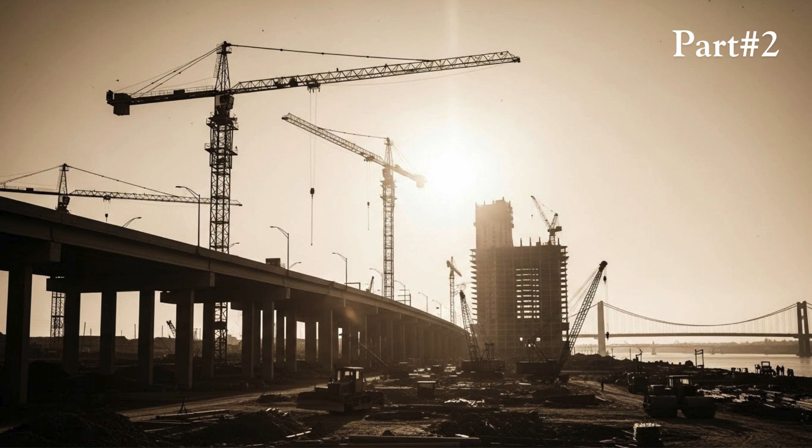To understand why this bridge failed, we have to go back, long before the day it collapsed. Back to a time when America was building at an extraordinary pace. When this bridge was first designed, the country was in the middle of an infrastructure boom. Cities were expanding. Traffic was increasing. Engineers were being asked to solve problems quickly and efficiently.

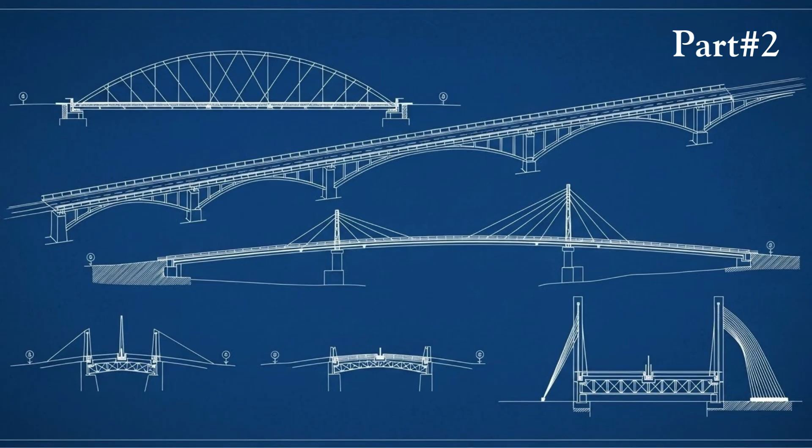Bridges were not just transportation tools. They were symbols of progress. This bridge was designed to meet the standards of its time. It followed accepted engineering practices. It was reviewed, approved, and constructed with confidence. And at the time, there was no reason to doubt those decisions. Because engineering, like all human systems, is shaped by the knowledge and assumptions available in that moment.

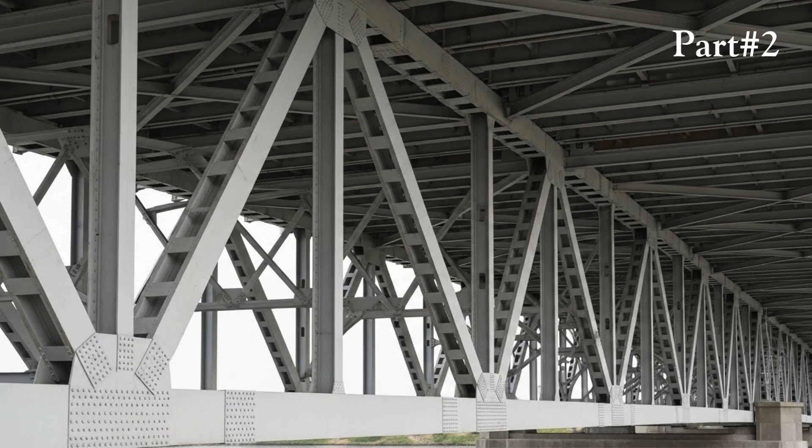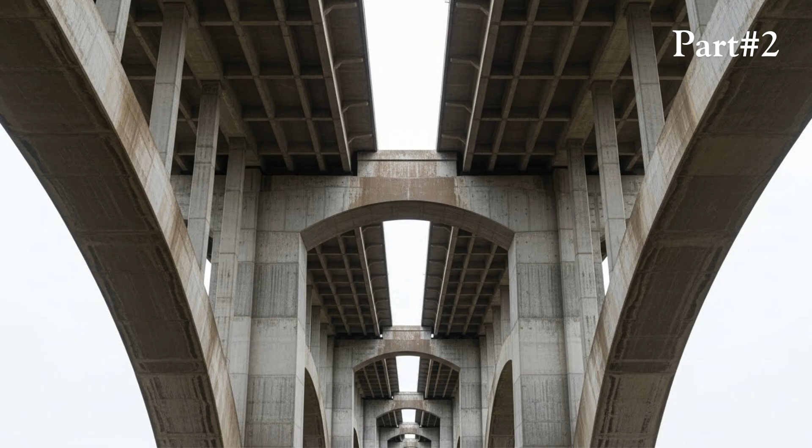The bridge used a structural system that was widely trusted. Steel components carried loads through interconnected elements. Forces were distributed across beams, joints, and plates. Nothing about the design appeared experimental or risky. In fact, it was considered efficient. Efficient designs use less material. They reduce costs. They meet performance requirements without excess. And for decades, this approach worked. But efficiency has a hidden weakness. It leaves less room for error.

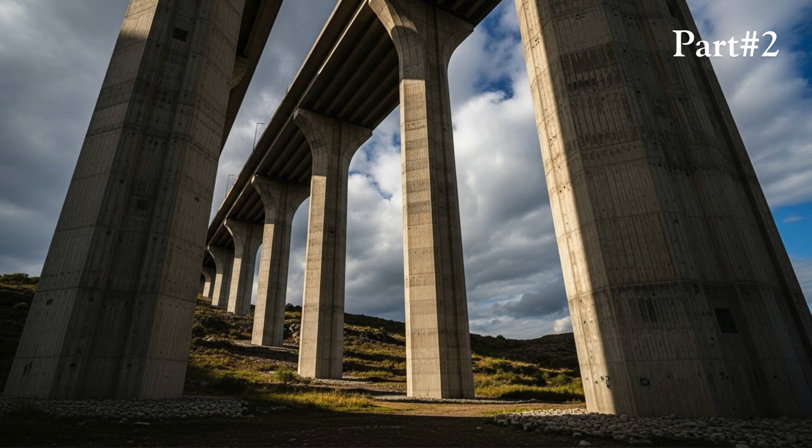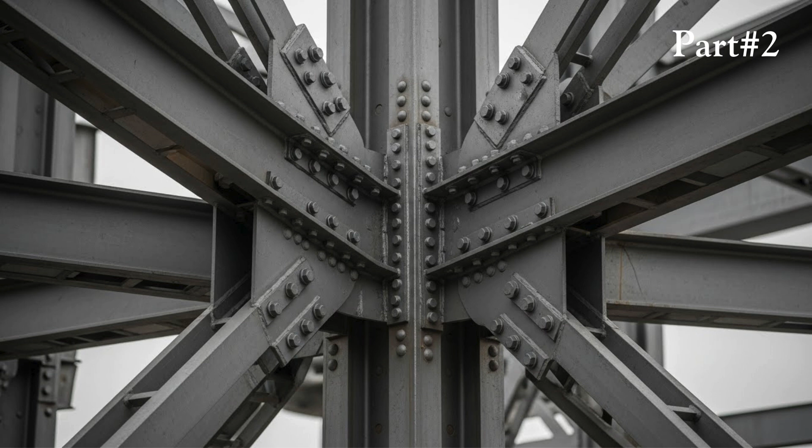When people imagine bridges, they think of massive beams and towering supports. But bridges don't fail because of the biggest pieces. They fail because of the smallest ones. In this bridge, certain critical components were responsible for holding multiple structural elements together. They were not designed to bend. They were not designed to stretch. They were designed to hold. As long as those components performed their job, the entire system remained stable. But if even one of them became overloaded, the consequences would ripple outward.

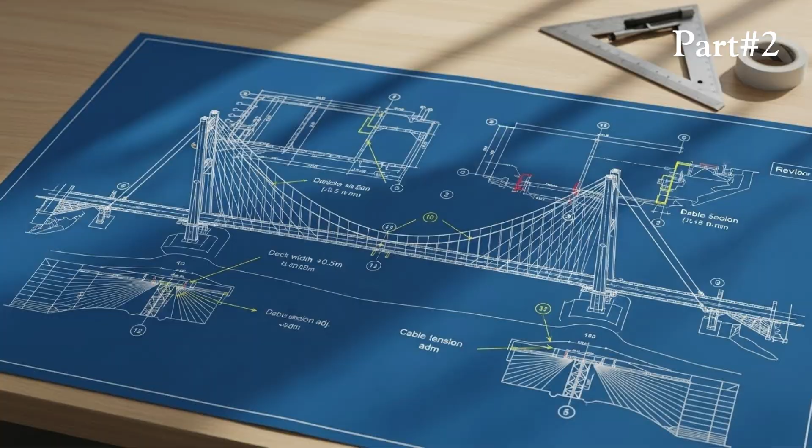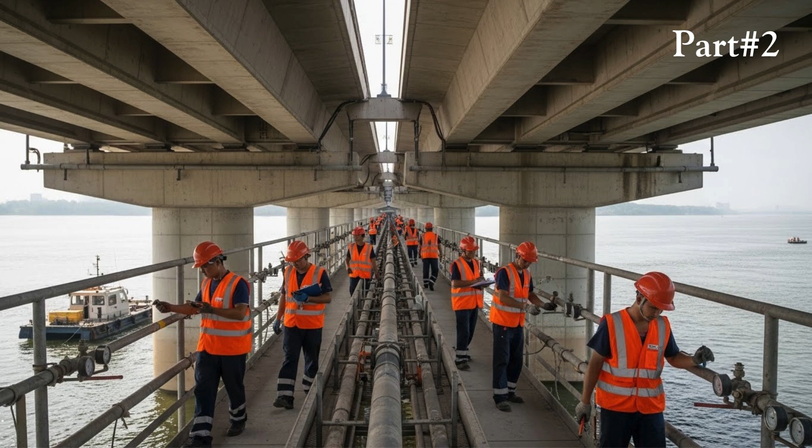At the time of construction, engineers made assumptions that seemed reasonable. Traffic volumes would grow gradually. Vehicle weights would remain within expected limits. Future modifications would be modest. Those assumptions were documented, reviewed, and approved. And for many years, they appeared correct. Traffic increased, but not suddenly. Repairs were made, but within expected ranges. Nothing dramatic happened, and that lack of drama reinforced confidence.

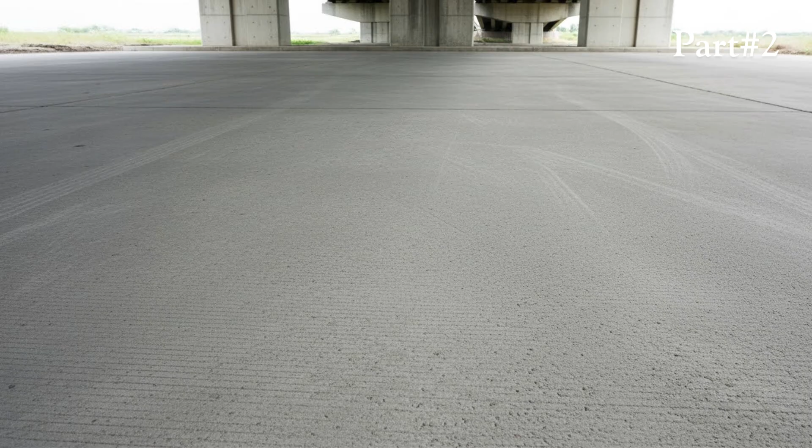As the years passed, the bridge aged like all structures do. Steel expanded and contracted with temperature changes. Concrete experienced stress from repeated loads. Connections endured millions of cycles of use. None of this is unusual. Bridges are designed to age. What matters is how that aging is managed.

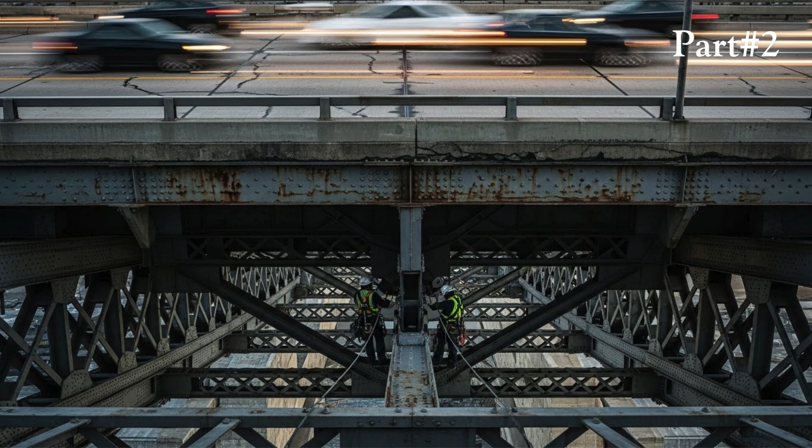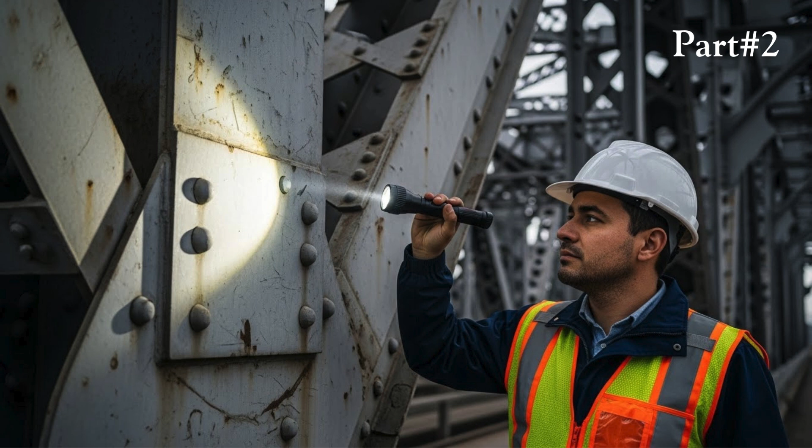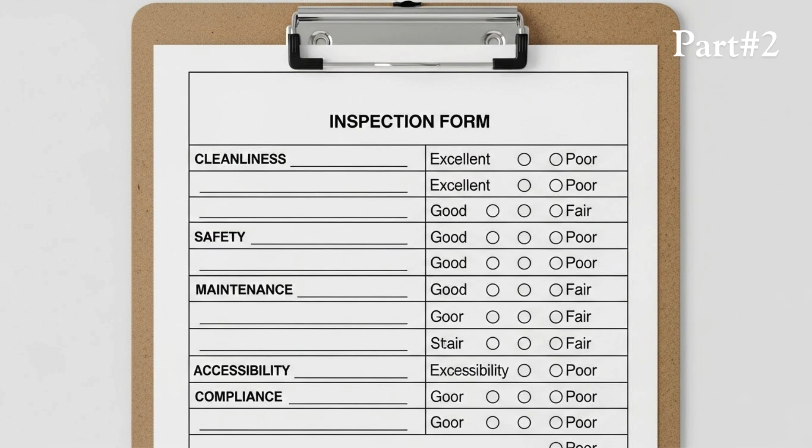Most Americans never see a bridge inspection. They don't know how often inspections occur. They don't read engineering reports. They don't study load ratings. And they don't need to, because inspections exist to remove that burden from the public. Inspectors examine visible components. They document wear, corrosion, and cracking. They rate structures using standardized systems. These ratings determine whether a bridge stays open, receives repairs, or is scheduled for replacement. In theory, this system works. In practice, it depends on interpretation.

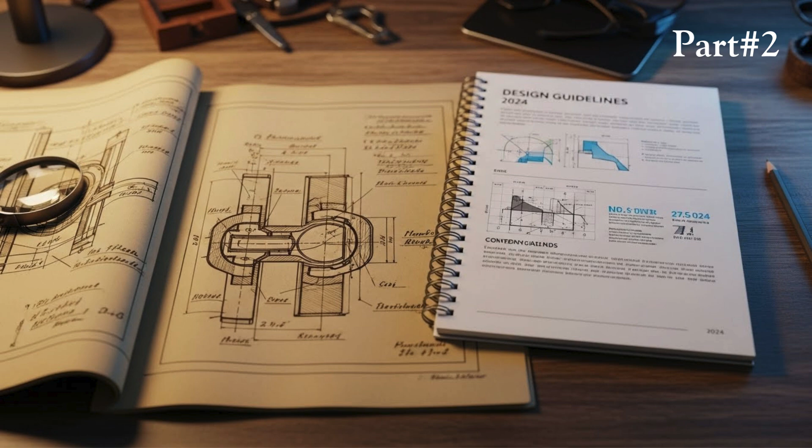This is one of the most misunderstood terms in American infrastructure. A bridge labeled structurally deficient is not automatically unsafe. It means that certain components do not meet modern standards. Many bridges across the United States carry this label and remain open for years. This classification can create a dangerous illusion. The public hears deficient and assumes urgency. Officials hear deficient and see a familiar category. And when a condition becomes familiar, it becomes normalized.

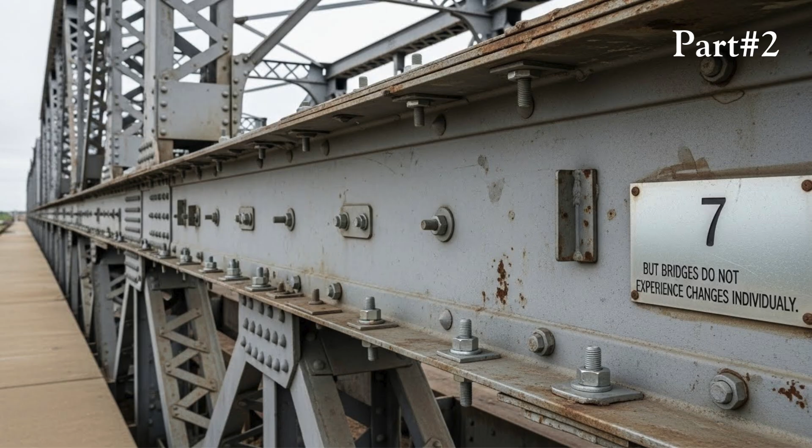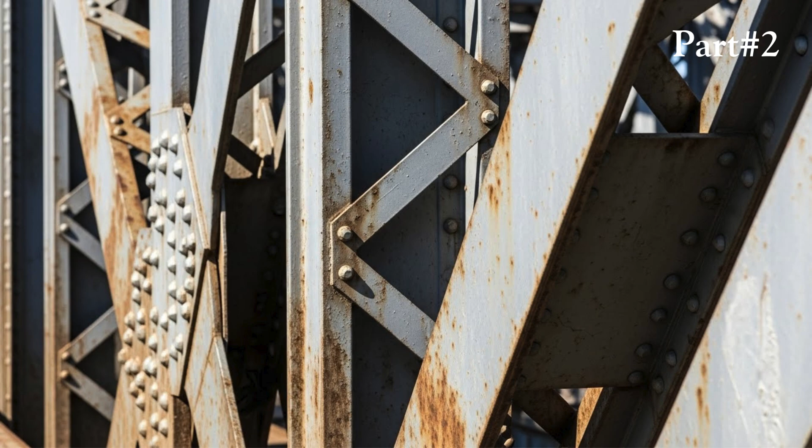Over time, the bridge underwent modifications. New equipment was added. Safety features were updated. Traffic patterns changed. Each change seemed small. Each addition was approved individually. But bridges do not experience changes individually. They experience them collectively. Weight added in one decade remains there in the next. Stress accumulates. Margins shrink. And those margins are rarely visible from the surface.

This bridge was designed under standards that no longer exist. Modern engineering places greater emphasis on redundancy. The idea that if one component fails, others can compensate. But this bridge did not have that luxury. Certain components carried more responsibility than engineers at the time fully understood. If those components failed, there was no backup. That is now a flaw by modern standards. It was simply how bridges were built then.

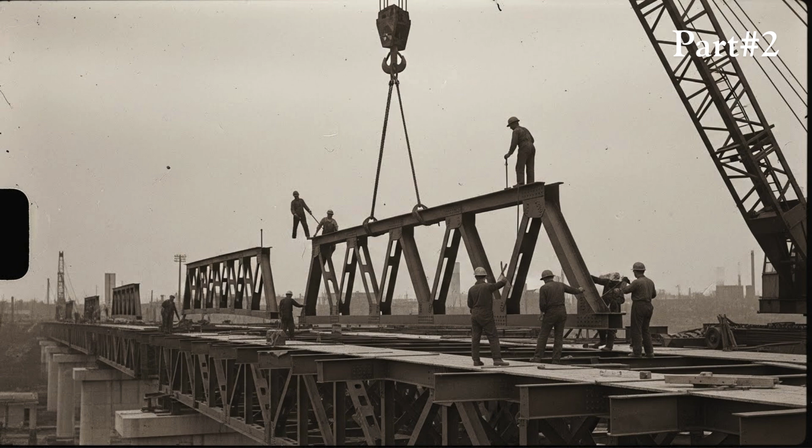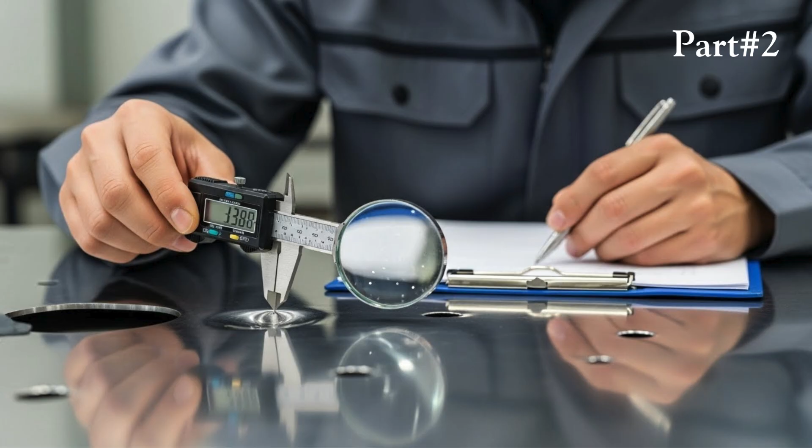Inspection reports noted issues: fatigue, stress, wear. But none of these findings triggered immediate closure. Why? Because they were not interpreted as imminent threats. Engineers often think in probabilities. A component may be overstressed, but not beyond failure. A crack may exist, but not yet critical.

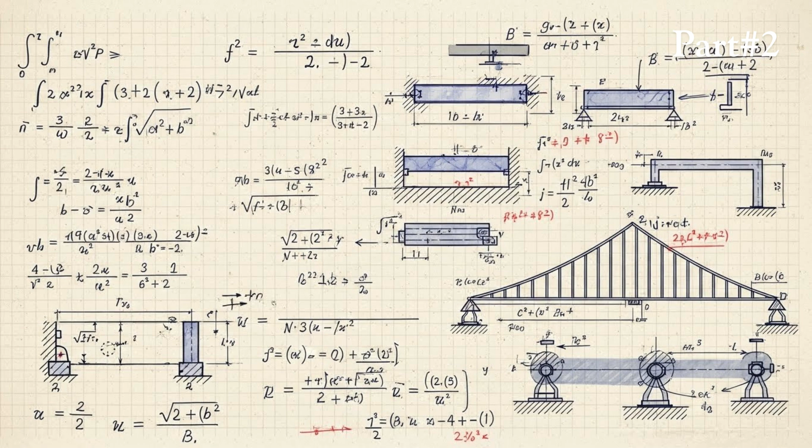And when infrastructure budgets are limited, decisions become comparisons. Which bridge needs attention first? Which repair can wait another year? These are not careless decisions. They're constrained ones. To engineers, the bridge represented a set of calculations. To the public, it represented a promise.

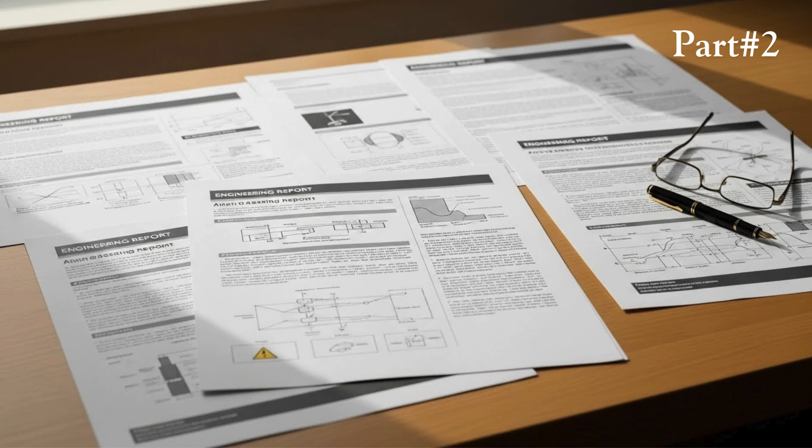That gap matters, because when engineers see gradual deterioration, they see time. When the public sees an open bridge, they see safety. And as long as the bridge remains open, trust remains intact. One of the most important things to understand about this bridge is that there was no dramatic turning point. No report screamed danger. No inspection demanded immediate closure.

Instead, there was a pattern: small concerns, manageable risks, deferred decisions. This pattern is common, and it is why infrastructure failures are so difficult to predict and so devastating when they occur. Engineering relies on models. Models rely on assumptions. Assumptions rely on data available at the time.

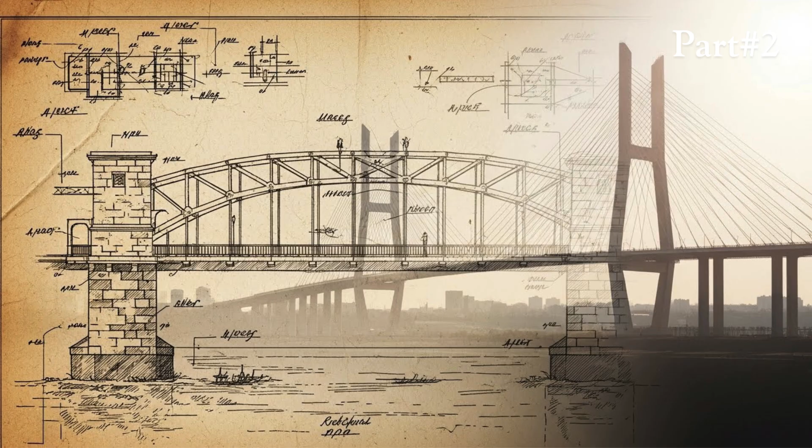What engineers did not know then is just as important as what they did know. Material behavior under long-term stress. The cumulative impact of repeated modifications. The interaction between multiple small changes. None of these were fully understood when the bridge was designed.

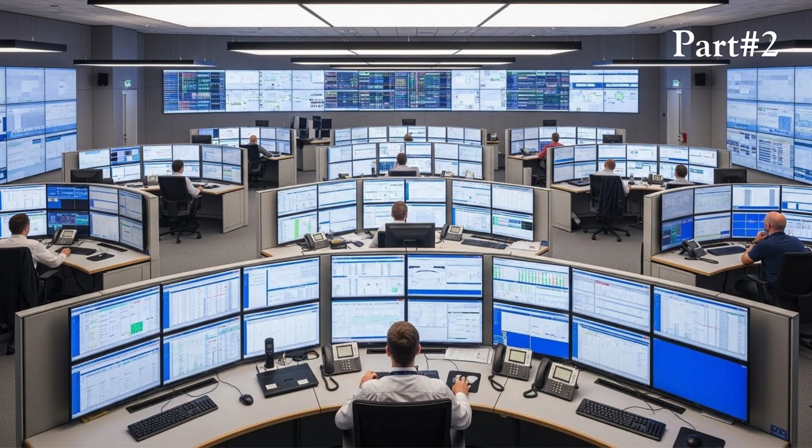From the outside, the bridge looked unchanged. From the inside, its stress profile was evolving. That difference is critical, because systems rarely announce when they are approaching their limits. They continue to function until they don't. This is the question Americans always ask. Why didn't someone stop it?

The answer is uncomfortable. Because nothing appeared broken. There was no clear threshold crossed. No rule violated strongly enough to force action. And when responsibility is distributed across systems, agencies, and timelines, urgency becomes diluted.

For decades, this bridge performed its function. It carried traffic. It supported commerce. It connected communities. It did not fail early. It failed late, after years of service, after countless successful crossings. And that success masked its vulnerability. The more familiar a system becomes, the less likely people are to question it.

Inspectors see the same structure year after year. Officials review similar reports repeatedly. Commuters cross without a second thought. Familiarity creates comfort. Comfort reduces urgency. At no point were commuters told, "This bridge is aging. This design has limited redundancy. This structure carries less margin than modern bridges."

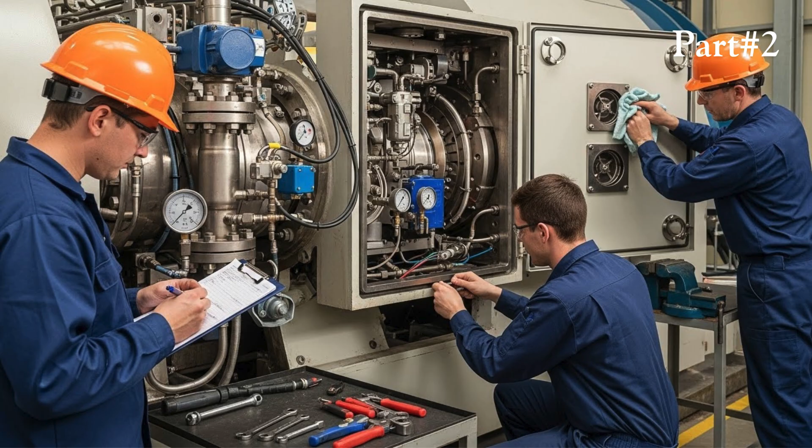They were never meant to be told, because the system was designed to manage risk quietly. And quiet systems fail quietly until they don't. By the time the public became aware of the bridge's vulnerabilities, it was already too late. The engineering story had been unfolding for years. Not dramatically, not urgently, but steadily. And that is what makes this failure so instructive.

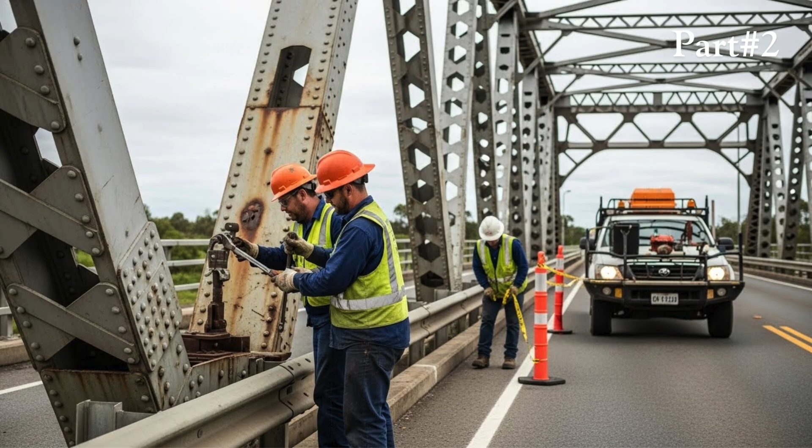This bridge was not unique. It was representative, built during a period of rapid expansion, maintained under constrained budgets, modified incrementally. Thousands of bridges across the United States share similar histories. And that reality raises a question that engineers and policymakers still struggle with. How do you prioritize risk when failure is rare, but catastrophic?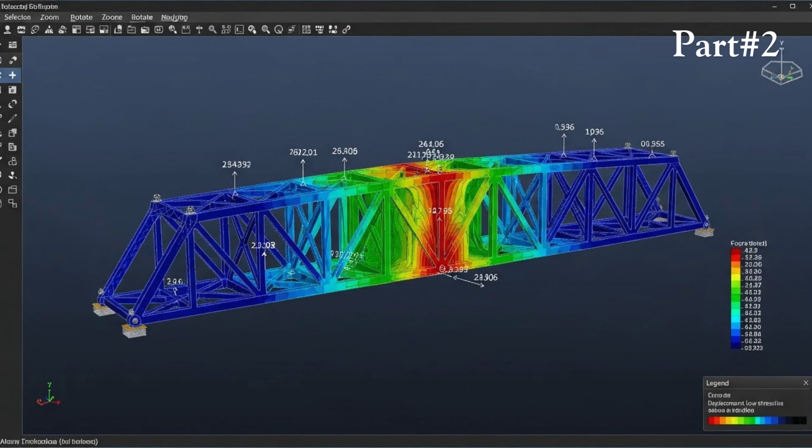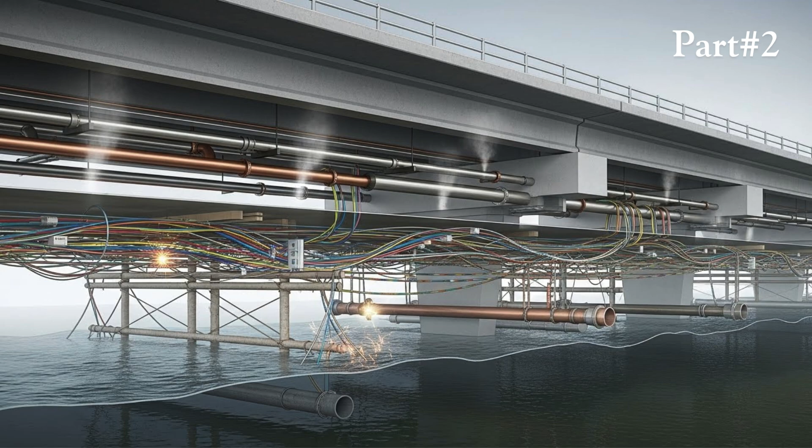Engineering can predict stress. It can estimate fatigue, but it cannot always predict timing. Systems often fail not at the moment of highest risk, but at the moment of coincidence. A combination of factors, a convergence of conditions. That unpredictability is what makes infrastructure both resilient and fragile.

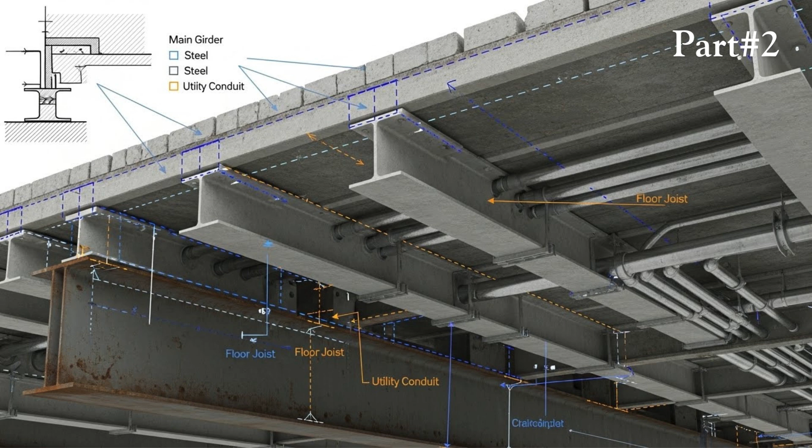The public saw a bridge. Engineers saw a system under evolving stress. Administrators saw budget constraints and timelines. Each perspective was incomplete, and none of them alone were enough to prevent what came next.

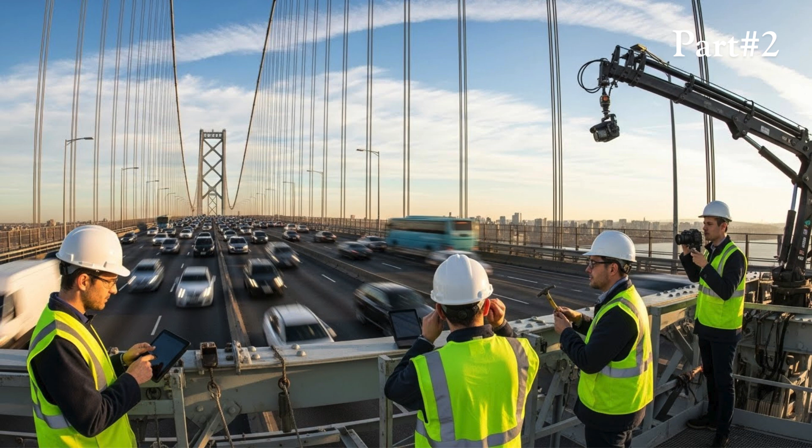This bridge did not collapse because it was ignored. It collapsed because it was understood, but not urgently enough. Because risk was acknowledged, but managed gradually. Because no single warning outweighed the comfort of continued operation.

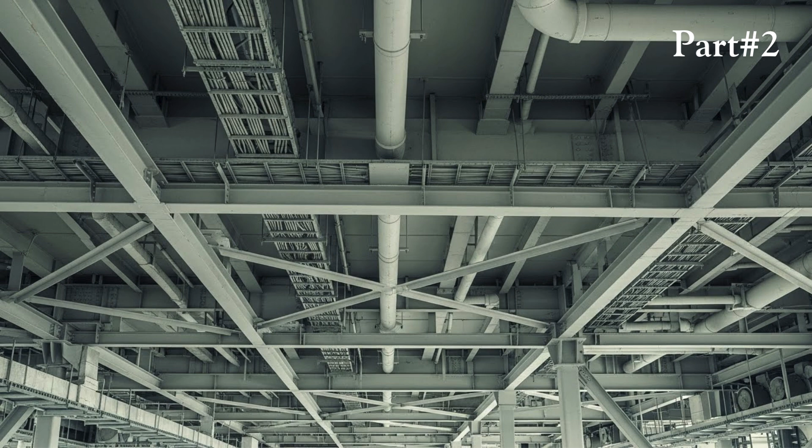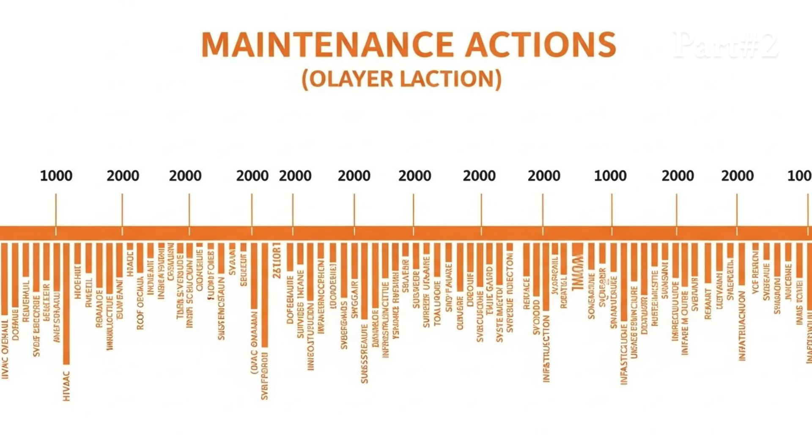By the time the day of collapse arrived, the bridge was already operating closer to its limits than anyone realized. Not because of negligence, not because of recklessness, but because of accumulated decisions made in good faith. That is the most unsettling part of this story.

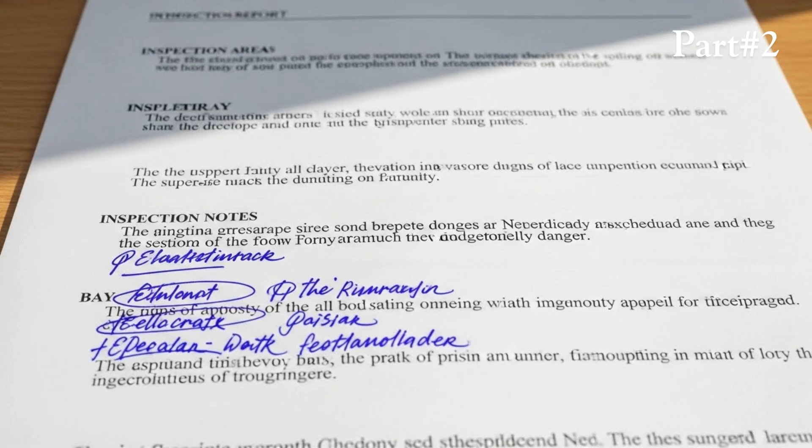In the next part, we move from design and history to the moment where knowledge met consequence, where warnings were no longer theoretical, and where decisions that once seemed reasonable became impossible to ignore. Because understanding how this bridge was built explains only half the story. The other half lies in what happened when people were told something wasn't quite right and chose to wait.